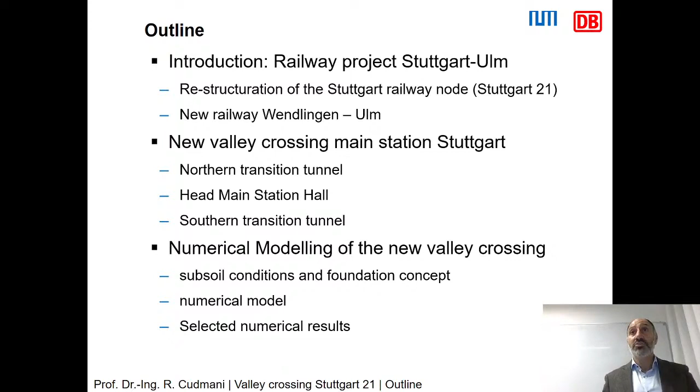Today I will focus on the advanced numerical modeling we did to investigate the settlement behavior of the new railway station, called in Germany Stuttgart 21. Time is very short, but I will try to give you a short overview about the high-speed railway project Stuttgart-Ulm, then describe a few distinguishing aspects of the new station, which is crossing a river valley. Finally, I will describe the subsoil conditions, the foundation concepts, the numerical model we used to model the deformation behavior of the station, and present a few selected results.

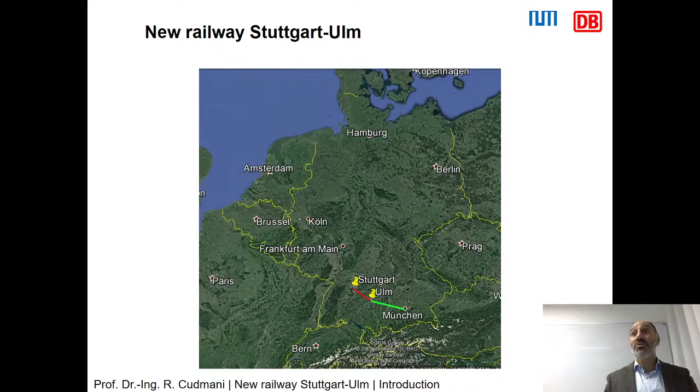The new railway will connect the cities of Stuttgart and Ulm. Considering the already existing new line between Ulm and Munich, it will allow a reduction of the travel time between the state capitals Stuttgart and Munich to about 75% of the current travel time of 2 hours and 20 minutes, and motivate probably many people to use the train instead of the car.

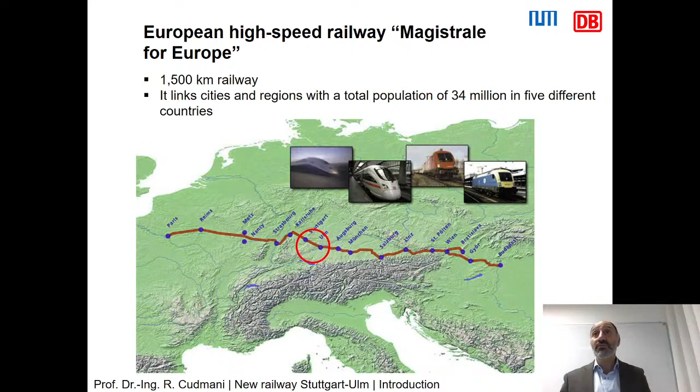It is worth mentioning that the project is part of a 1,500 kilometer European high-speed railway linking important cities from 5 different countries between Paris and Budapest.

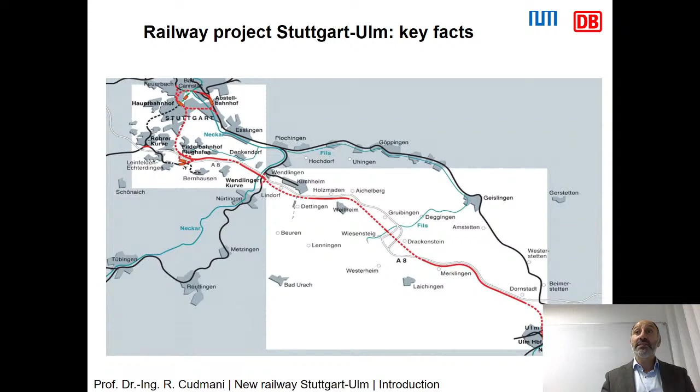This is a project overview. The dark line is the existing, more than 100 years old, railway connecting the cities of Stuttgart and Ulm, which follows the highly complex mountain relief and does not allow high-speed transit for this reason. The new railway, shown in red, has a total length of about 120 kilometers and a maximum train velocity of 250 kilometers per hour.

It can be divided into two principal parts: the new railway connecting the city of Wendlingen with Ulm, within the yellow frame, and the reorganization of the railway node Stuttgart, in the green frame, which includes the new station Stuttgart 21.

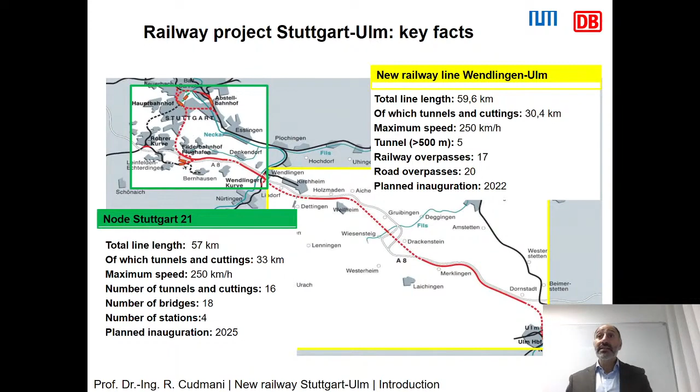The construction in highly populated areas, the environmental constraints and restrictions in and around Stuttgart, and the geomorphology of the region make this project extremely complex and challenging, not only from the engineering point of view. One proof of the technical complexity is that more than half of the alignment consists of tunnels and bridges.

The city of Stuttgart is placed in a valley surrounded by mountains, like a vessel with an opening in the northeast. To travel from west to east, the railway enters the vessel, stops in the terminus station, and leaves the vessel to the east. The problem with this alignment is not only the time delay caused by entering the vessel through the city, but also the precious city areas currently occupied by the rails.

The new railway will cross the surrounding mountains and the Nesenbach Valley from west to east. It will be located in the same place as the old one, but rotated 90 degrees and below ground level.

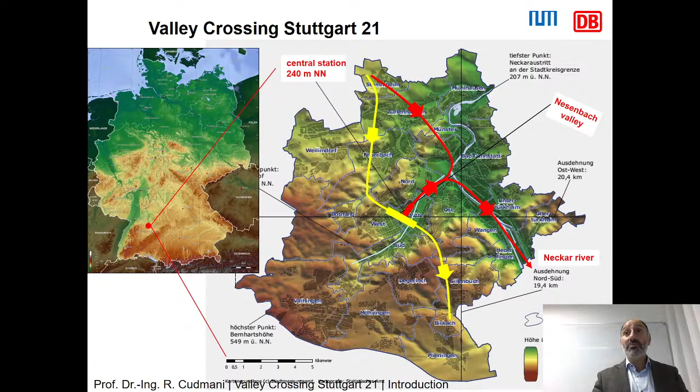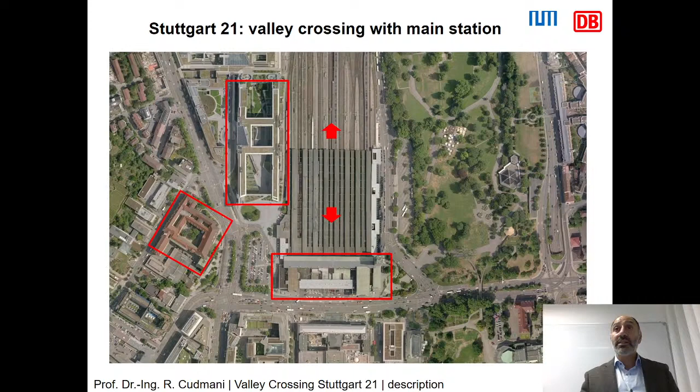Exemplarily, the red rectangles highlight the State Bank of Baden-Württemberg on the east, a very sensitive building, and two heritage buildings: the old direction building of the Deutsche Bahn, the German train company, on the left, and the old station building on the bottom, which has to be conserved and integrated into the new station.

The new station is rotated 90 degrees with respect to the old one, as we said before, and will be constructed with the cut and cover method. It consists of the main station hall and two transition tunnels, one on the left and one on the right, connecting the station with the mining tunnels.

The valley crossing has a total length of 870 meters and a maximum width of 80 meters. The three buildings mentioned exemplarily are also shown in the picture.

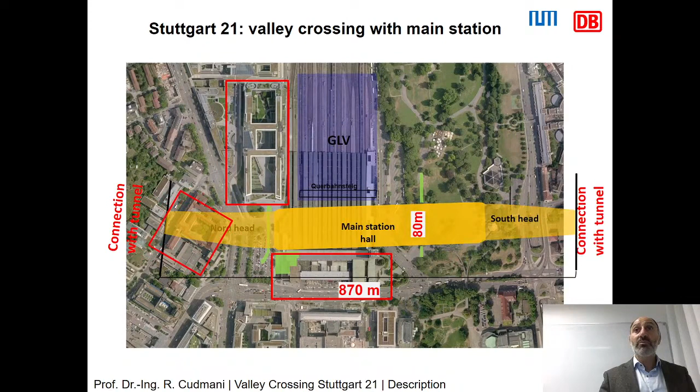Especially challenging was the conservation of the DB direction building on the west. The 10-story building was temporarily underpinned to allow the tunnel construction underneath, and finally the building will be supported by the tunnel.

We see a detail of the valley crossing with the main hall in the center, about 450 meters long, and the north and the south transition with lengths of about 200 meters. The transition tunnels are more or less conventional cut and cover concrete boxes. On the contrary, the main station hall is an architecturally and structurally very demanding and special construction.

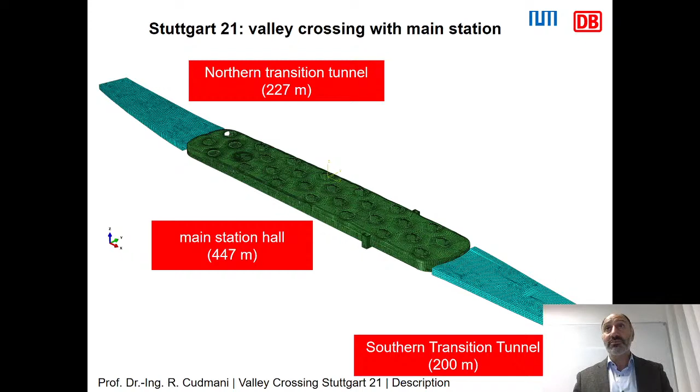The roof is a reinforced concrete shell with a thickness varying between 0.3 meters and 1.5 meters, and does not contain any joint over the complete length of 450 meters. The base of the structure will be around 14 meters below the present ground level.

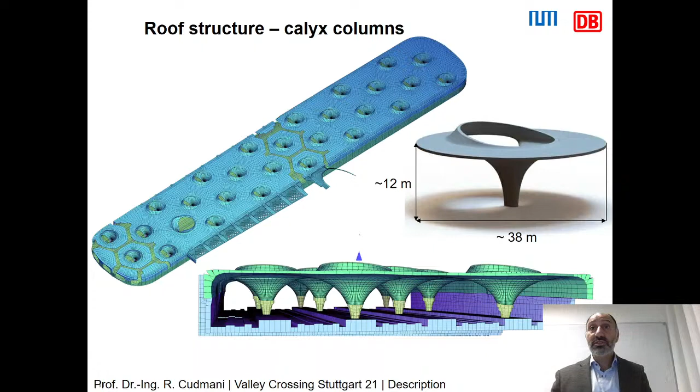The roof was designed by star architect Christoph Ingenhoven, and the structural part was made by the engineer Werner Sobek. According to the architectural design, the concrete structure will not be painted. Instead, a special white concrete was developed and used in construction.

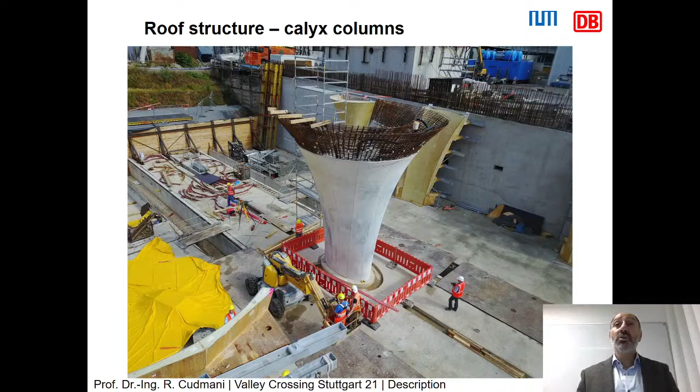The construction of the columns is extremely challenging. First, the toe of the column is constructed. You can see here the toe and the scale in comparison with the person beside the column.

Then the upper part of the calyx column are constructed, and after finishing this construction, the column is temporarily supported, as you see in the picture. The gap between the columns is closed after finishing adjacent columns.

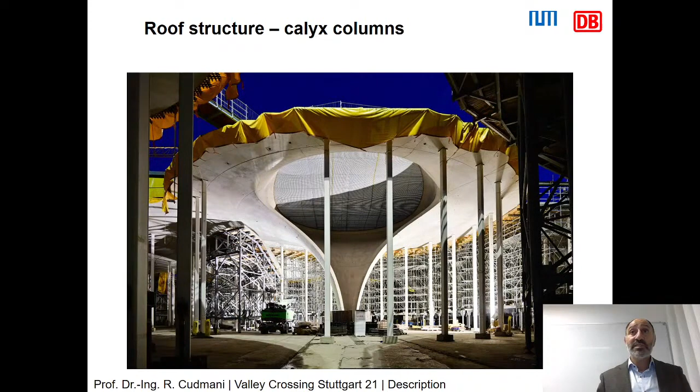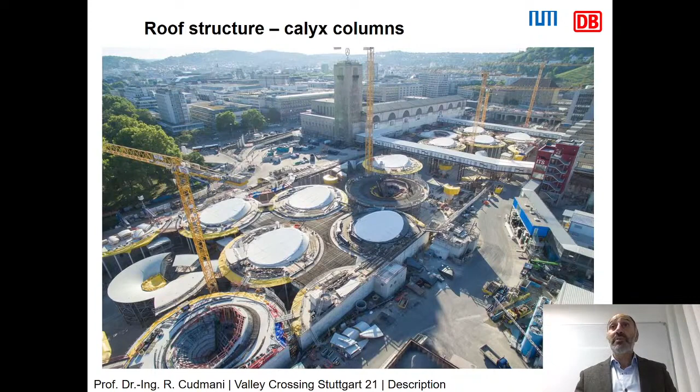Here you see the current progress of construction with several columns already finished and some gaps being in the process of closing.

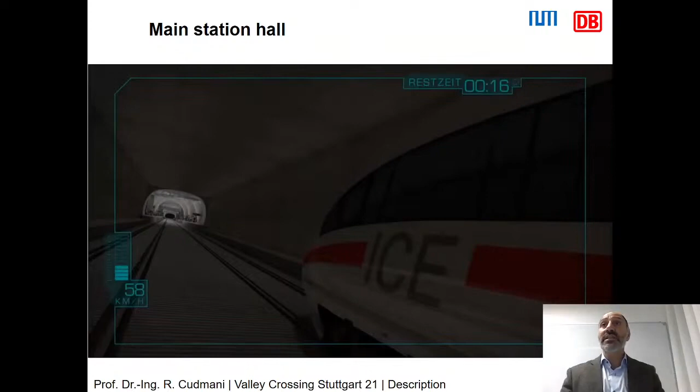Finally, I would like to present a short animation of the station from the perspective of a train traveling from the transition tunnel into the new station. You see the columns, and you see the openings on the top of the columns

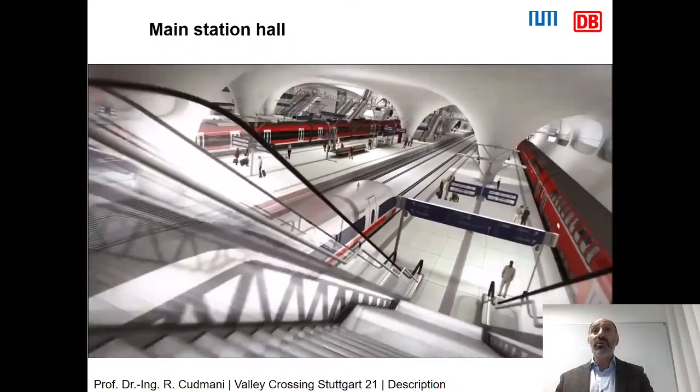allowing the natural light to enter in the station, and during the day it will allow to illuminate the station without any electrical necessity.

The geology in Stuttgart consists of several sedimentary Jurassic and Triassic formations which are partially covered by quaternary sediments in the valley. This formation consists of sandstones, siltstones, claystones, marls, and gypsum upon limestone.

Near the surface, the rock formation can be slightly to strongly weathered. In some places in the valley, it is completely decomposed to residual soil.

Beside the quaternary aquifer, there is a second aquifer, an artesian mineral water aquifer in the limestone, which is intensively exploited in Stuttgart, and therefore it is important from the economical point of view for the city.

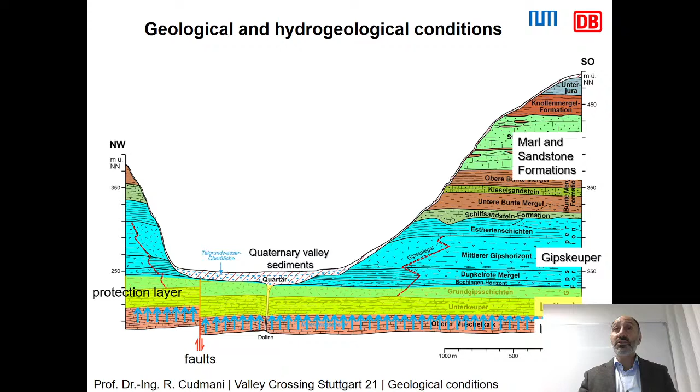The protection of the mineral water aquifer imposes several restrictions to the project and is conditioning the construction of the station strongly.

Owing to the heterogeneous geological conditions along the valley and at the flank of the hills, the geotechnical properties are also varying along the station.

Most part of the hall lies on fluviatile sediments and decomposed sedimentary rock. The north and the south transition and a part of the hall will rest on weathered clay and siltstone.

The main requirements of the foundation are to limit the deformation and differential deformation of the roof structure and the railway, to avoid damage of underlying underground structures, and to ensure water tightness.

To fulfill these requirements, accounting from the geotechnical conditions and the restriction to protect the mineral water aquifer, a mixed foundation was selected. The calyx columns and the walls are founded on bored and Franki piles.

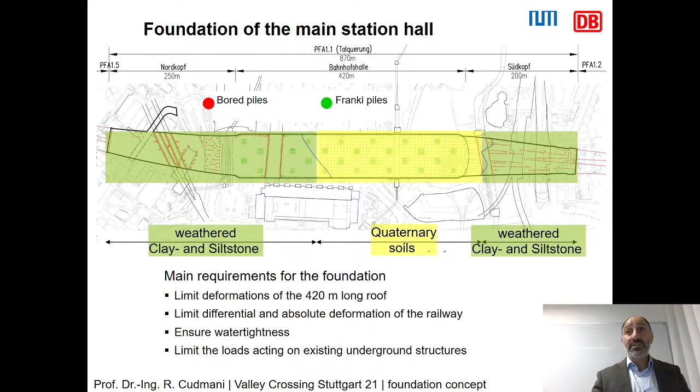Between the columns, the loads are transferred to the ground by the slab directly. Additional piles are arranged between the columns depending on the soil stiffness, to bridge underlying structures, and to reduce settlements. For different reasons, which I will not be able to explain in the short of the time, the station has to be constructed in 25 sections.

The construction process includes several different construction stages taking place in different sections at the same time.

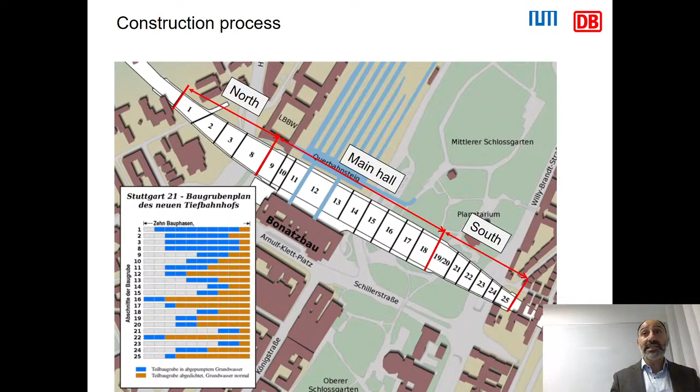To realistically predict the deformation of the station and the rails, as well as the influence of the station on the underground structure and neighboring buildings, a 3D finite element model considering the soil foundation structure interaction in detail and the construction process was developed.

Here you see the finite element model at the end of construction. The area is about 1 square kilometer. The depth of the model is about 80 meters. The model is considering the real topography of the valley and its flanks.

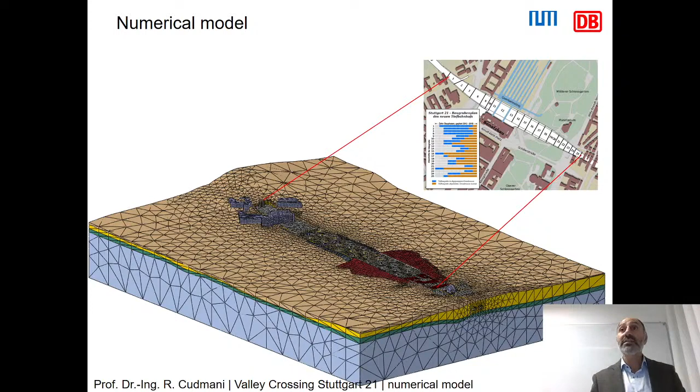For the simulation, we use the program Simulia Abaqus. An elastoplastic constitutive model similar to the hardening soil model was implemented as a user material and used to model the behavior of the relevant geotechnical units. The model has more than 1 million degrees of freedom.

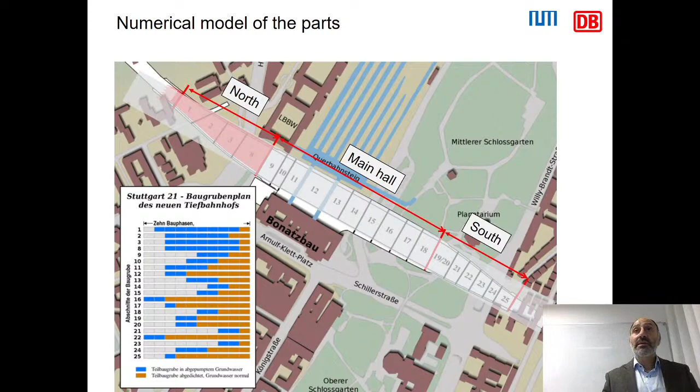The slides show screenshots of the station hall, the north and the south transition, and the ground models. As you can see, underground structures and buildings which will be constructed on the north and south transition are considered in the model.

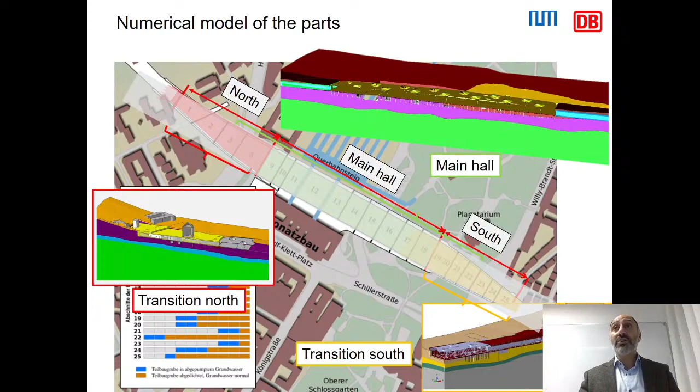The structures composing the station were modeled in detail. In this slide, you can see the hall and the transition tunnels, the beginning of the mining tunnels, underground structures and facilities, and several buildings on top and beside the north and south transition tunnels, which will be constructed after the station has been finished and will cause additional deformation of the structure. The interfaces between the structure and the ground are modeled with contact surfaces using the Coulomb friction law.

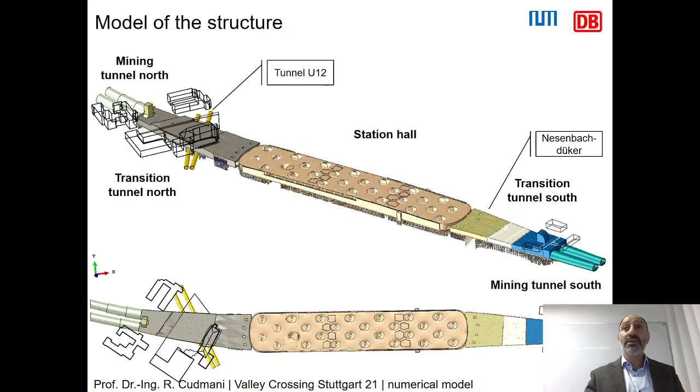In the 3D model, every single pile, including nonlinear load-settlement behavior, has been modeled. The load-settlement behavior of the single pile was determined based on the results of pile loading tests, and depends on the soil layers in which the pile is embedded and on the pile type. To consider the 2,000 piles of the foundation, we developed a new modeling strategy using so-called embedded elements and connector elements. To my knowledge, the size of the model, combined with the high level of detail of the structure, the foundation and the construction process, and the nonlinear behavior of soil, interface and piles, is so far unique.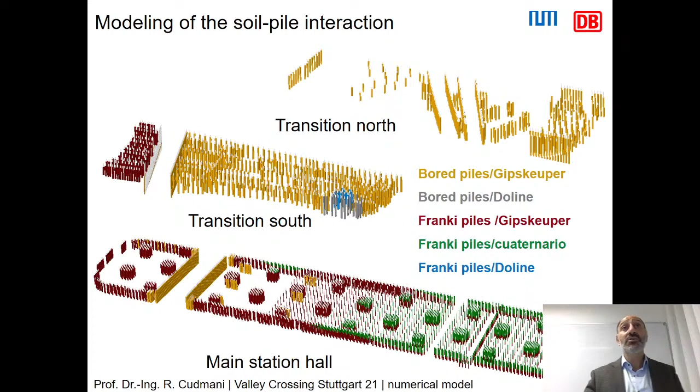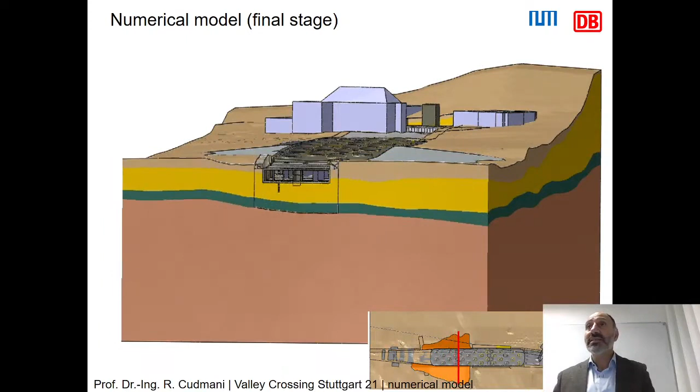This animation shows transversal cuts through the numerical model, starting from the mining tunnel at the south, passing through the transition tunnel, the station hall, the transition tunnel in the north, showing the underground infrastructure and the piles, and ending at the mining tunnel in the north.

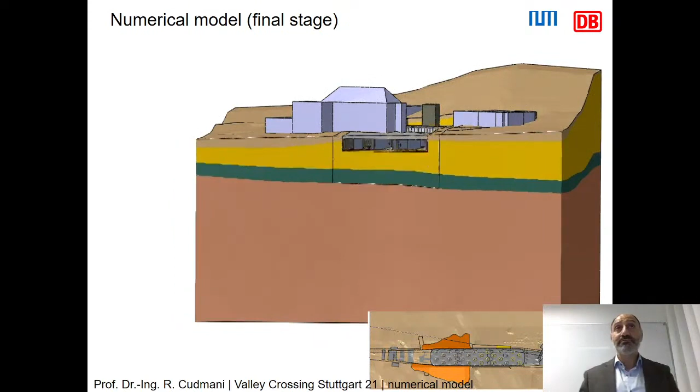The simulated construction stages can be visualized through a longitudinal cut along the model. As mentioned before, different construction activities take place at different sections at the same time. This has a big impact on the settlements and differential settlements of the foundation and deformation of the structure, and of course has to be taken into account in the modeling.

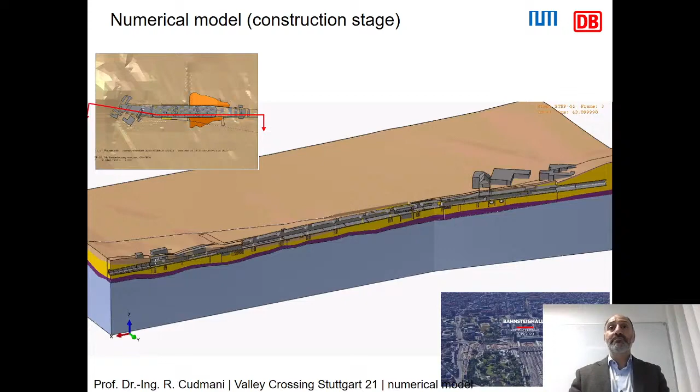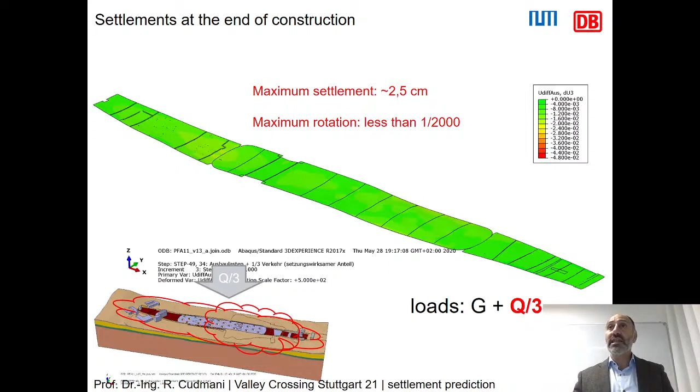These contour plots show exemplarily the settlements at the end of construction for the permanent loads and one-third of the service load. The maximum settlements are about 2.5 centimeters, and the maximum rotations are less than 1 to 2,000. After constructing the building on top and applying the full service load, the maximum settlement increased to about 5.1 centimeters, but the rotation still remained less than 1 to 2,000.

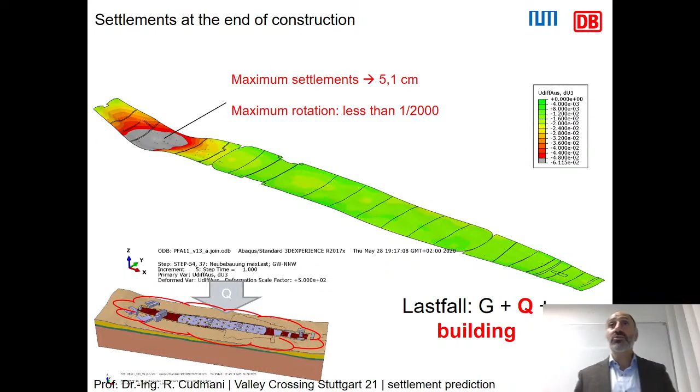This diagram shows the settlements along the station. On the left side we have the settlements of the transition north, on the right side the settlements of the transition south, and in between the settlements of the hall. The different curves correspond to 3 of 8 rails, 1 in the center and 2 at the edges of the hall. The shadows show the range of settlements due to the possible range of soil parameter variation considered in the calculation.

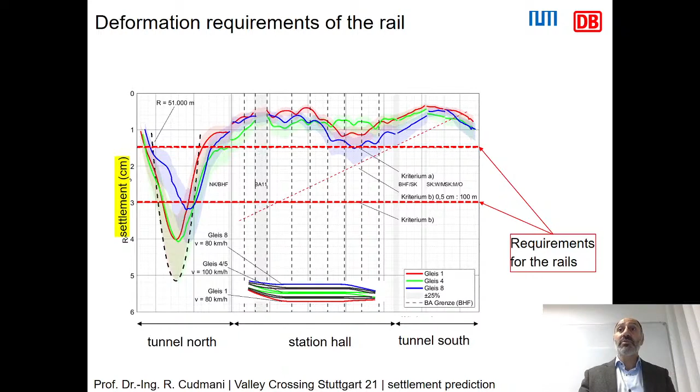The settlement requirements for the rails are very stringent. After installation of the rail, a maximum settlement of 1.5 centimeters is allowed; exceptionally, 3 centimeters can be accepted. As we can see, this criterion is fulfilled in the station, with the exception of the north transition after construction of the building on top. At this location, settlements will be measured during construction of the building, and an adjustment of the rails, which is extremely expensive, is planned in case the settlements become larger than 3 centimeters.

Let us finish with some final remarks. The geological and hydrogeological conditions have strongly conditioned the design and construction of the central station. A 3D model was required for the analysis of the serviceability limit state due to the complex mixed foundation construction sequence, the susceptibility of the rough structure to differential deformation, and the protection of the existing underground structure. Considering the size of the model, the high level of detail of the structures, the foundation and the construction process, and the nonlinear behavior of soil, interface and piles, we conclude that the 3D model is so far unique.

The observational method has been applied to validate the numerical models and to improve the quality of the prediction during construction. This is a process which is still undergoing.